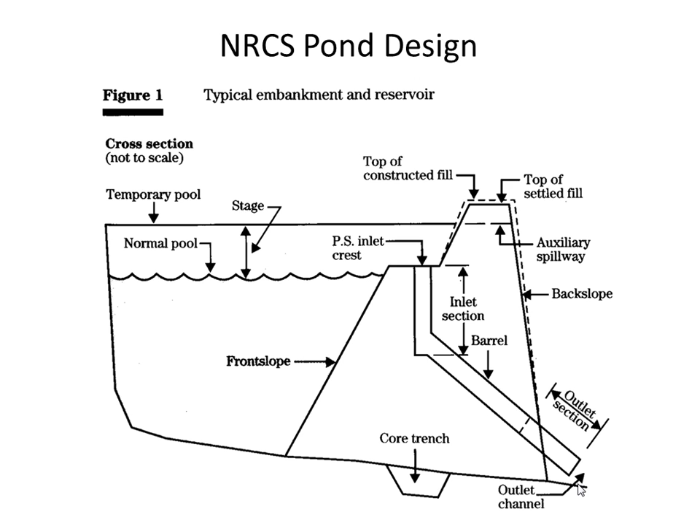Normally these ponds are built to water livestock, and I'm thankful Ed Rayburn was kind enough to encourage me to be on the program here today. These types of designs are well established and marvelous. It seems to me the one at the animal science farm is currently not functioning—it's not actually providing water to a trough down below—and I think the pond itself needs to be renovated. But this is a marvelous tool; the designs are well known, and it's a fine example.

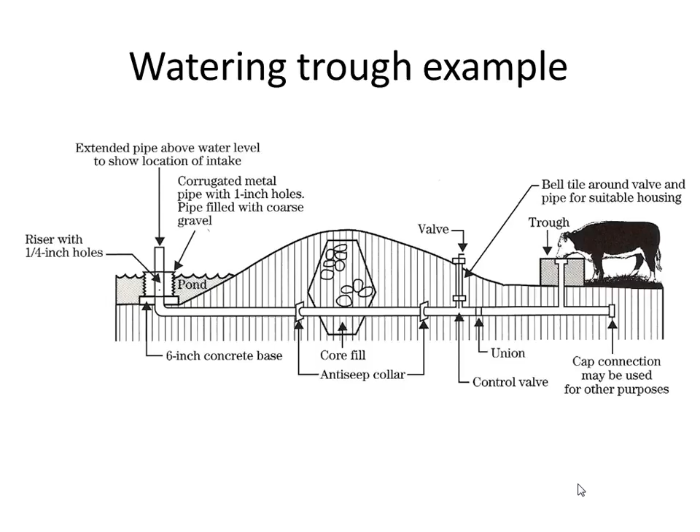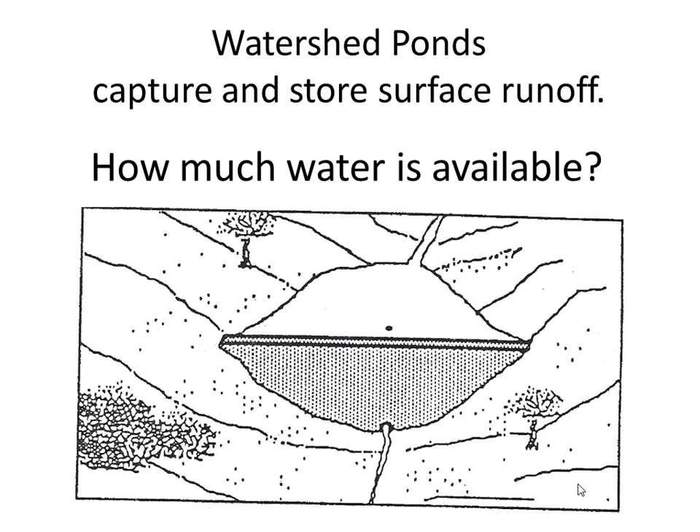Joshua and I were kind of asking ourselves, how much water do we let go? I don't have the answer to this, but the next question would be: what is the value of that water were we to use it? So we went through a mental exercise and chose a particular example. I'm going to go through several slides here that get to a bottom line.

Obviously, you can have a drought year, you can have watershed characteristics, whether it's wooded or whether it's pasture or whether it's something else, whether there's seepage, and so forth. So we went through a particular routine here.

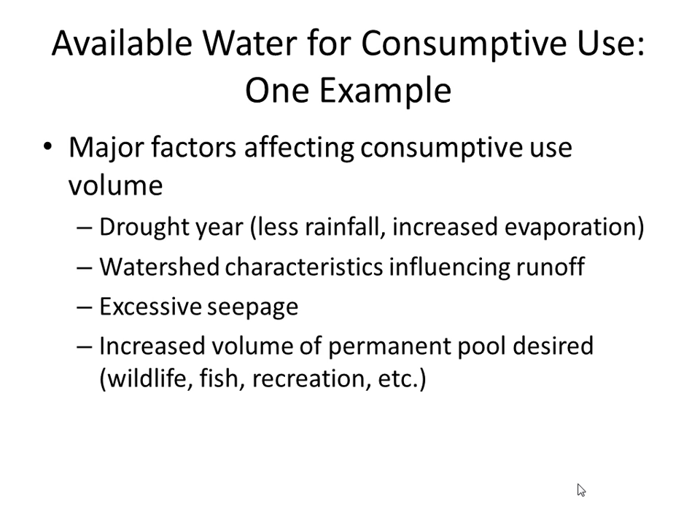All right, we assumed 50 acres as an area. So we're talking at this point in time how much water comes off a watershed of 50 acres. We assumed that it was located in central or western West Virginia, given the soil types and so forth. We assumed an average climate year. We assumed that there was a pond in that 50-acre watershed that had 2 acres of surface area. We assumed a typical seepage of 2 inches per month. And we assumed, retain a permanent pool of 20% of overall volume.

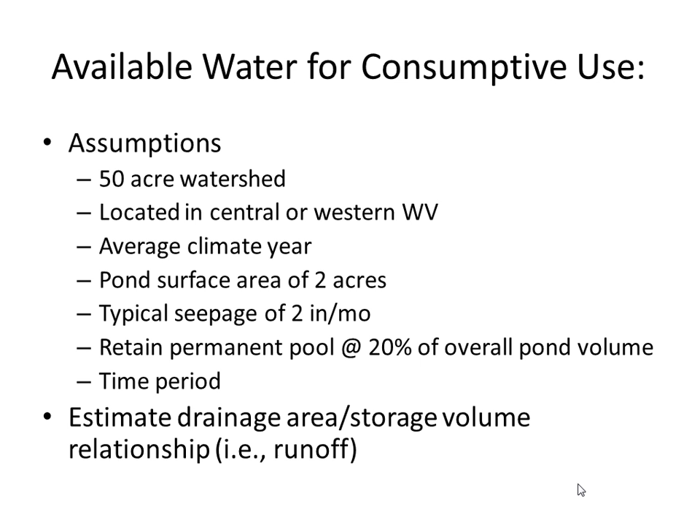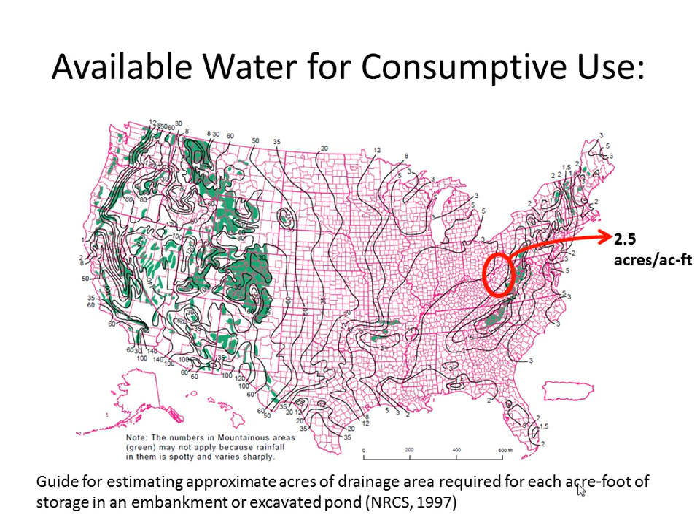So the basic idea is to take an average situation with about 50 acres, and we took some general numbers. It's not like we have a particular farm and we have data off that farm. We're saying, off of this particular chart in this area, 2.5 acres per acre foot. This is a guide for estimating approximate acres of drainage area required for each acre foot of storage in an embankment or excavated pond. This was a source of information that Joshua went to get.

We assumed woods, we assumed good coverage, and that it would be protected, and we assumed soils with a slow infiltration rate. With these assumptions, a 2-inch rain would yield about 1/4 of an inch runoff, or about 1 acre foot of water. So in a 50-acre watershed, a 2-inch rain yields 1 acre foot of water runoff.

What do you suppose a 4-inch rain would do? Twice that? 3 times? According to Joshua's calculations, because you don't have that water going down in the ground the same way, more of it's going to run off. And he estimated about 5.5 acre feet.

And 1 acre foot of water is about 325,000 gallons of water. I think in terms of acre feet when I think of ponds. I think in terms bigger than a 1/2 acre very often. Let's see.

So these were some of the other numbers that Joshua came up with for the 50-acre watershed. Runoff of 20 acre feet, rainfall of 2.7 acre feet, evaporation 3.6 acre feet, seepage 1.3, and a permanent pool volume of 4 acre feet. After losses, he estimated that there was 13.8 acre feet available for consumptive use.

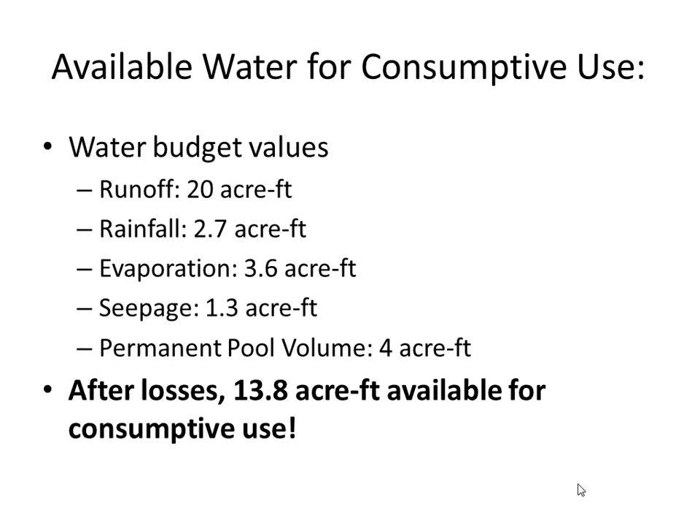If you're using it for human consumption, you're going to have to do something to it, obviously. If you're using it for livestock or whatever. So that's kind of, yeah. Say again? I didn't understand, I'm sorry.

Dry hydrant, yes, absolutely. So when I look at the traditional design of a pond, what I see is something that's especially good at watering livestock. That's originally the reason it was built.

It does add value to the property, and these days we have homeowners that want to have a pond near their property. Perhaps they'll use it for a dry hydrant, and that'll lower your insurance rates a tad. But they're not thinking about watering livestock. They're thinking about recreation. They're thinking about just a nice vista.

But recreation is obviously important to them, and fishing and so forth. Wildlife gets benefit from these things, and it does capture sediment and nutrients, and I'm sure that was an important goal for the original pond projects that NRCS was involved with more commonly in years past. And there's your dry fire hydrant. So absolutely.

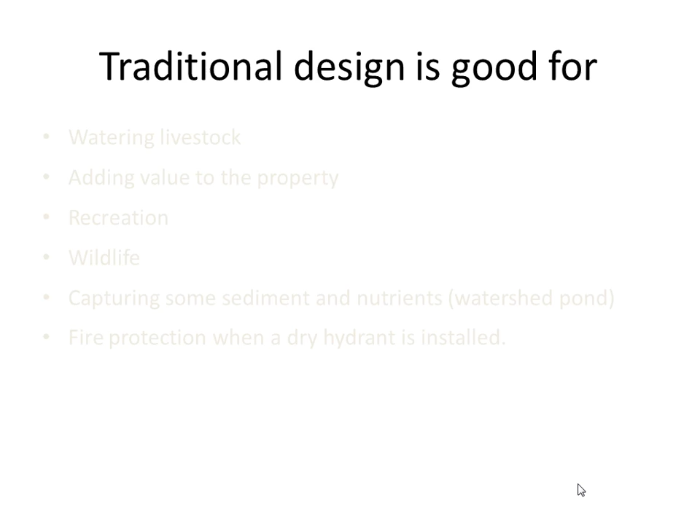It's not so good for some other things. There usually isn't enough water there to irrigate. You have a half-acre pond. You can water your livestock, but for livestock, if you're doing 10 gallons per head per day, it's a relatively small volume. If you're irrigating an orchard, I don't know how many inches of water you have to put on, but you can use that half-acre pond, that 2 acre feet, up fairly quickly for irrigation. For field and orchard spraying, you might be able to use it a good bit.

One of the things that you normally want for field and orchard spraying is a nice clean water supply that doesn't have debris and so forth in it, doesn't have aquatic plants that'll help clog things. Anyway, aquatic farming, that's where I'm coming from. We can use this water to grow things, whether it's for our personal use or perhaps to create a profit opportunity.

I'm always interested in microhydro, but I can't say I have ever seen anyone doing it successfully. I always use that as a litmus test. If there's an idea out there that's been around a while, and I can't find anyone who's doing it and making it work, whether it's for personal gain or for personal profit, I'm usually suspicious of it.

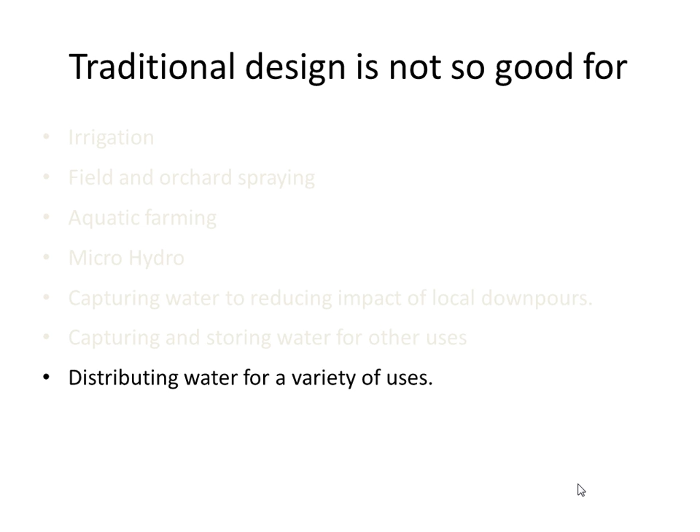So I'm going to show you a few other drain systems here. These are things I've run into through the years. I don't remember exactly where this particular figure came from.

You may have seen it before, but in this case you have a handle that goes down to a little valve, like a shear type valve, and then you have a riser here. I really like this—they put a wider pipe over the top of that so that you're doing what I call deep water release. That is, the water is being released from fairly deep in the pond, and it goes out.

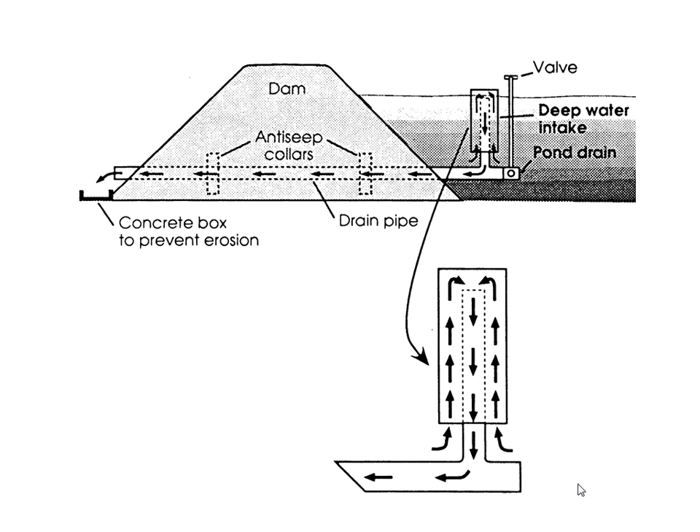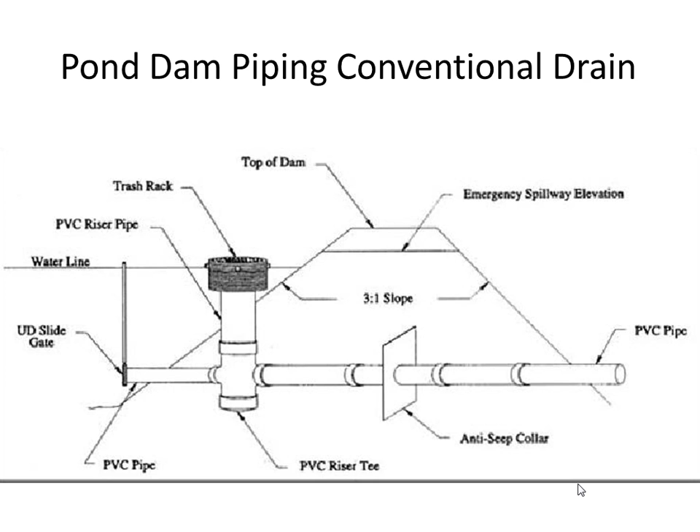Here's Pond Dam Piping, a place out of Georgia. They also sell these siphons—I think I have something on that—but this is very similar to the other one. This is all PVC material though, and they have a trash rack, and they don't have the deep water release on this.

You may have run into AgriDrain. AgriDrain has a very interesting and I think a very nice set of products. In this particular case, they have these boards that slide into a groove, and here's your water level set by those boards in that tower. And once again, you can get deep water release off the bottom of this pond.

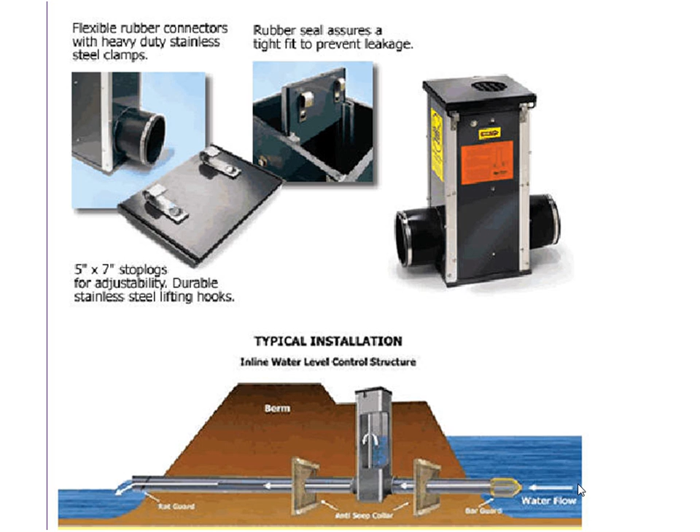Of course, all of these things that are put in the pond have anti-seep collars. And when you're making a pond like this, it adds cost. Putting this type of system in adds cost. It's something you really benefit from if you ever have to work with that pond in the future. But in installation, sometimes you short these types of costs. So if you have to ever drain a pond—and these are some of the reasons—you have to repair a pond.

Sometimes ponds will get full of silt. Over a period of time, it'll add up, or they'll get a whole lot more mud on the bottom of them, and you may have a need to renovate it. There are some types of weeds where if you have a winter drawdown, you can kill the aquatic weeds around the edge. That would be another reason to have the ability to control the water level.

When these sediments build up in these ponds, they'll have a lot of organic matter in it. And if that is exposed to the sun, that will bake. You've seen mud bake down over time. It gets thinner and thinner. It cracks, and you can oxidize these sediments. It's actually very good, it's healthy for an old pond to be able to dry down, and it's a way to make a lot of these nutrients more available than when you fill the pond back up again.

If you ever have to recover fish, it's handy to have the drain. Imagine if you could not empty a pond, you couldn't be sure that if you're going to grow a crop of fish. You basically have to finish one crop, get all the animals out, and then very often you'll poison it so that there are no animals left, even in the drain pipe or even in the footprints or the holes that are in the bottom there.

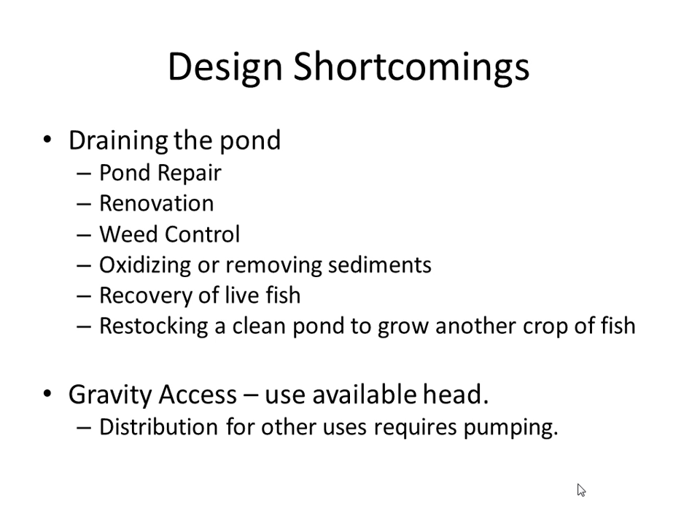Okay, so I'm going to throw out the concept of a multi-use pond, and I will not claim that I have one. I wish I did. I'd like to put one on the Reedsville farm. I have a location picked out. But this particular concept is where you're intending to capture the surface water and manage it for a variety of benefits that really can be set by you. You can decide what enterprises you want.

If you applied this, you would end up with larger impoundments, watershed ponds, and some way of a different design on the drain system.

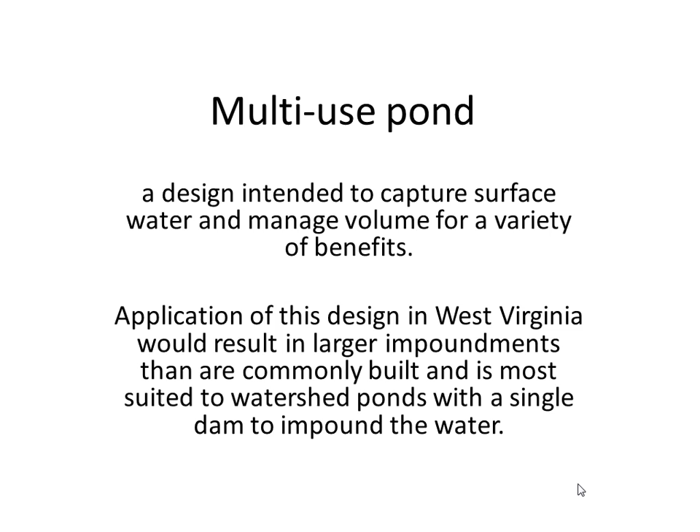So you set aside in your mind, I'm going to take the top 4 foot, or the top 3 foot, or the top 6 foot, whatever it is. And then you have a drain structure of some sort that will allow you to do that.

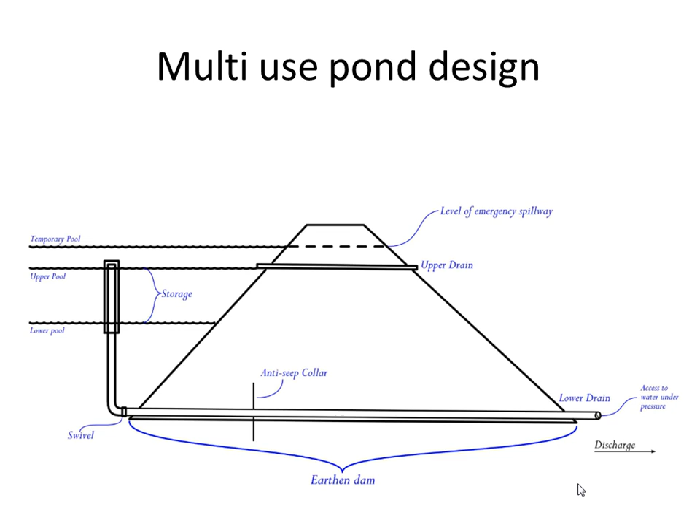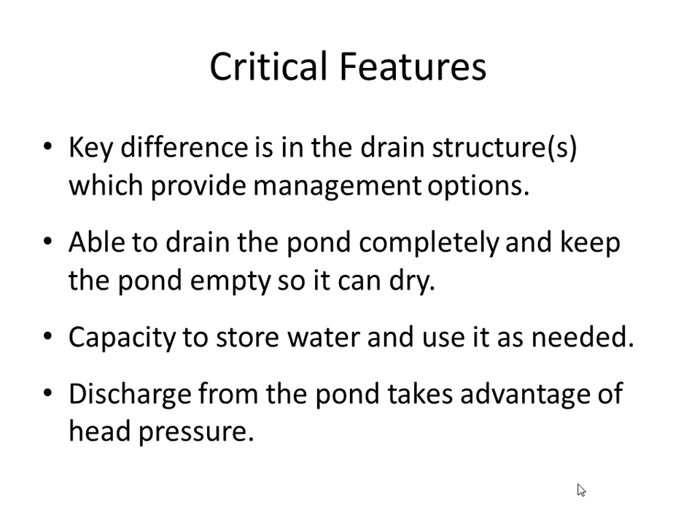I'll show you some more why in a minute. So the basic difference is in the drain structure. You can drain the pond completely and keep it empty so it can dry, or you can have capacity to store water and use it as needed, discharging from the pond taking advantage of head pressure or gravity.

To me, those are the components of a multiple use pond. So here's a couple of ideas. You could vary the size of the storage area. You can set aside in your mind whether you're going to take the top 2 feet or the top 10 feet of water.

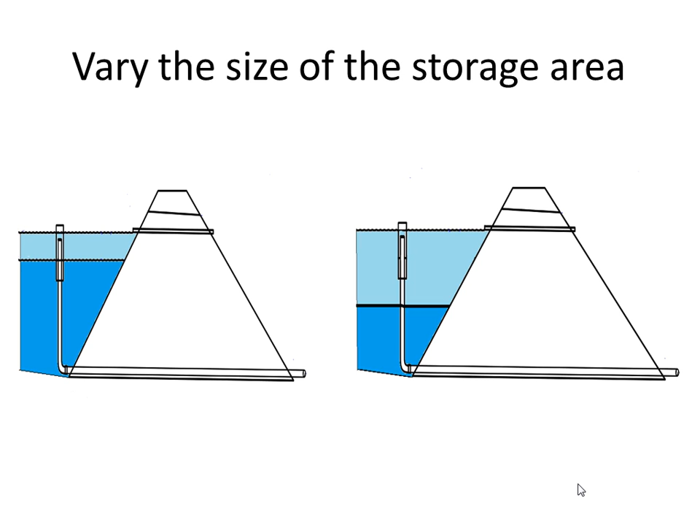And you can have a variety. I have what I call consumptive uses and then non-consumptive uses. Think of this: if you have first a non-consumptive use followed by a consumptive use, you end up using the water twice.

So traditionally we're talking about watering livestock. Let's keep doing that. Maybe you want to have an acre of sweet corn. Maybe you want to grow peppers. Maybe you want to grow some kind of higher value vegetable crop that you might sell locally. Maybe you'll have a high tunnel. Maybe you'll have both.

These days, some people are building ponds to harvest water so that they can use it to frack. I'm calling that the fill and tote. It's not as though this is a reservoir that's used at the well site. This is simply a place where you're capturing the water, and that water is then taken somewhere else where it is used. So this is simply harvesting water, and in fact there are a number of ponds that have been built by energy companies for this purpose.

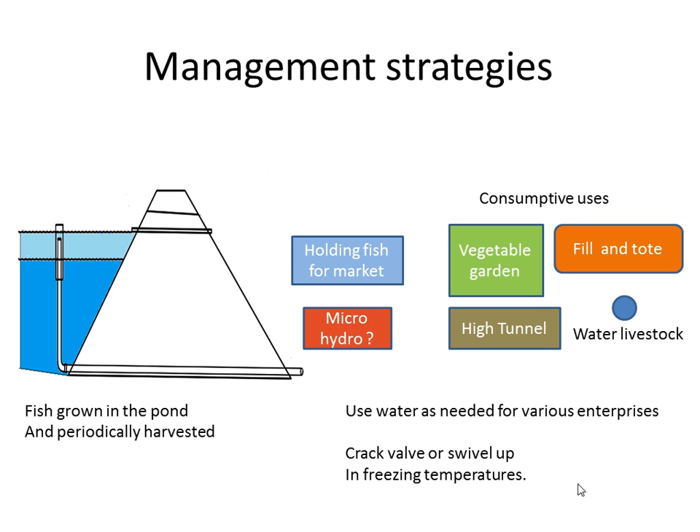I like this one too, whether you're holding fish or growing fish for market. But I don't know if there's a possibility for microhydro, and that's why there's a question mark there. So, these are some of the ideas.

How much water does it take to grow an acre of sweet corn? I think you're talking about maybe three applications of 1 inch. How much is 1 acre foot of water? If you have 1 acre foot of water over a 30-day period, it will deliver 7.5 gallons a minute.

If you have 1 foot of storage, 1 inch per application, that's 12 applications over a 1 acre area. Or, 1 acre pond versus a half acre pond with 1 foot of storage, 3 inches per application, 2 applications over a 1 acre area. These are just different scenarios you could go through.

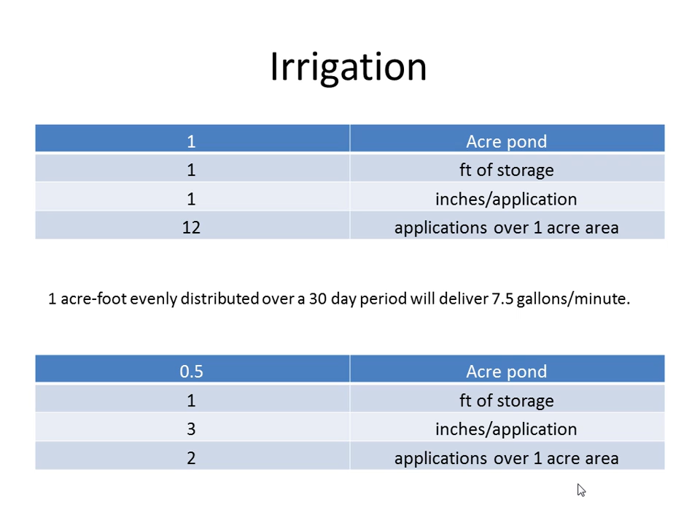I also look at maybe having some levee ponds below that, with a crop of catfish fingerlings in there, maybe some bluegill or hybrid bluegill or something like that.

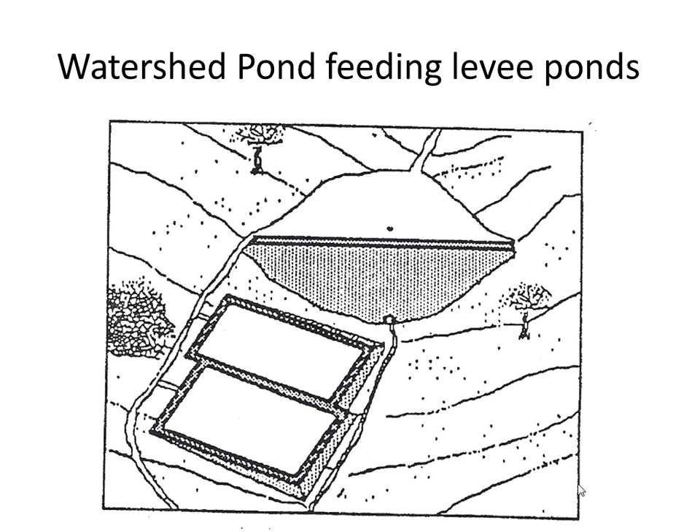There is new technology that comes around—Joshua gave this to me—a supplier of grassland and forage irrigation systems out of New Zealand. This is a little different type of system, and perhaps at some point new technology will make it so we can make better use of our water.

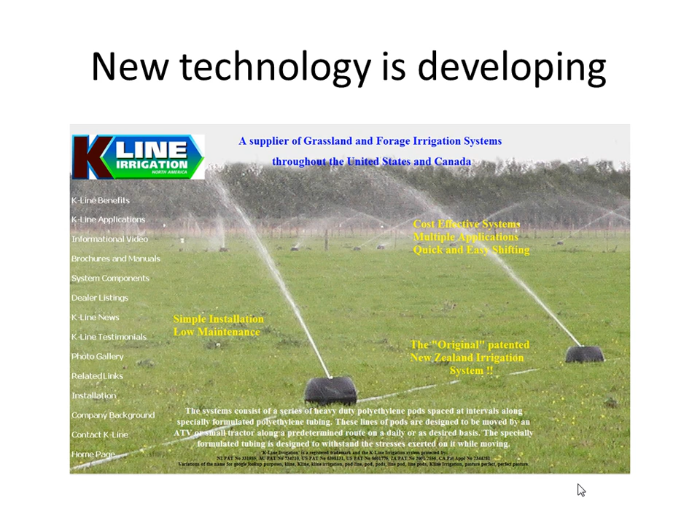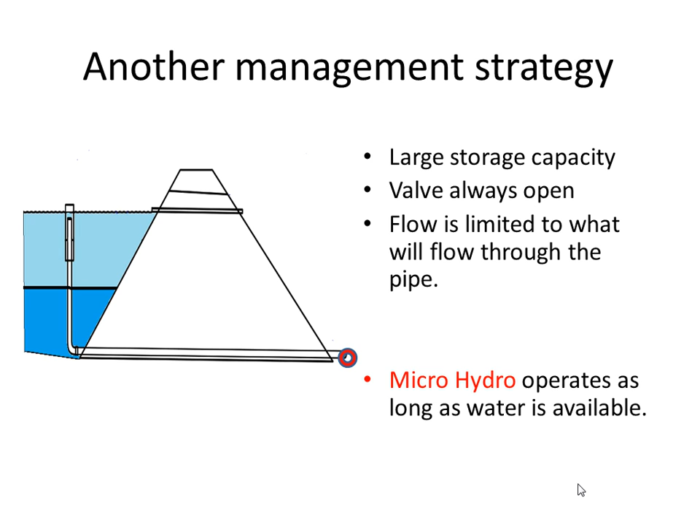Another management strategy: large storage capacity, leaving the valve open. All right, I'm going to go through here. This is where I like the flooding type thing. Imagine if we had these things spread over a watershed, and let's say they were dams large enough that you're going to use the top, say, 6 foot of water, or the top 4 foot of water. If you had them in series, what would be the result?

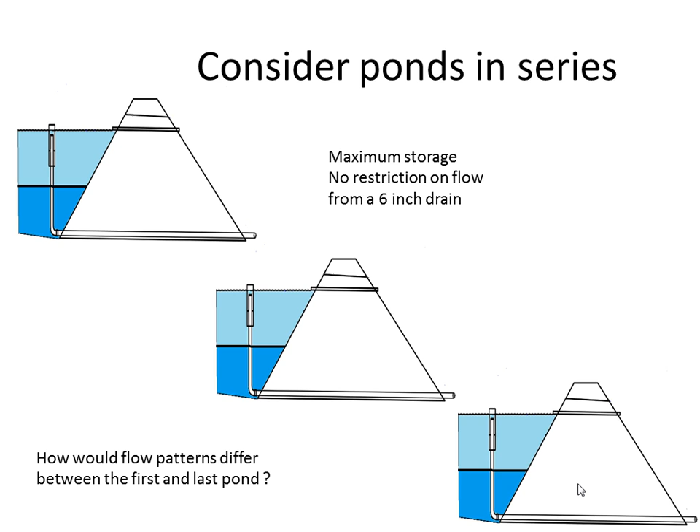Let's say this one is at the head of the watershed, this one is another half mile below it, and this one is maybe another 500 feet below that. Or maybe there's even more on the watershed. What would tend to happen is that, if the water ended up being distributed by essentially what comes out of the drain rather than what goes around the spillway, it would be like a big sponge. Certainly it won't be as dramatic as that, but it could have an effect of spreading out this flow over a much longer period of time, or at least a portion of the flow.

But it doesn't have the effect if all of the ponds are full and it all just happens—it goes around the spillway and spreads out, at least changing your temporary pool. But if you designed these things to capture water, and considered a water budget for distributing that water over time, we could have a greater impact than we do with our current ponds. I like swivels.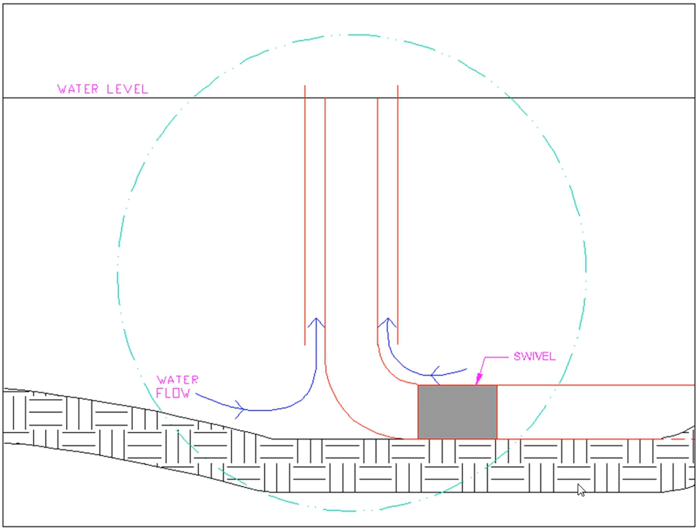I always like to put a deep water release situation on. Tom Baisden—Tom, are you here? Tom put one of these in his pond. He's got a pond just below his house, and he's got one in.

You can also put the swivel on the outside, and this is what we did in Arkansas. We ended up having a winch.

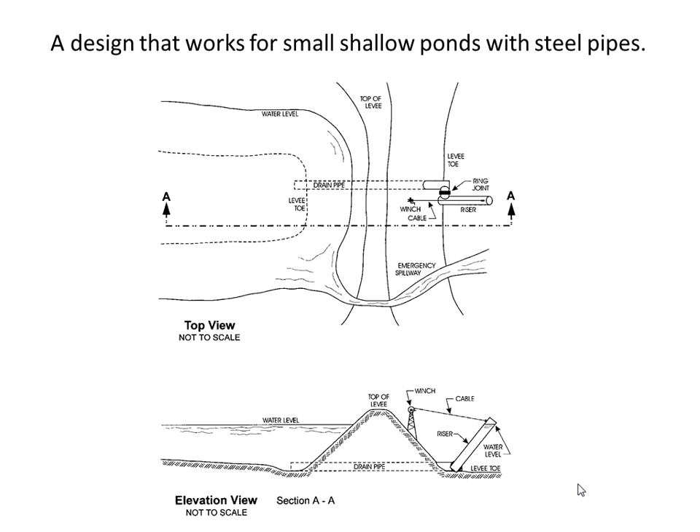One of the problems was we had to tie the handles on these winches because they had cattle. Those cattle would go up and rub against that, trip the winch, and the pipe would go down—when you come back in the morning, the water's dropped about 3-4 feet. Fortunately, the fish don't tend to go through at that point.

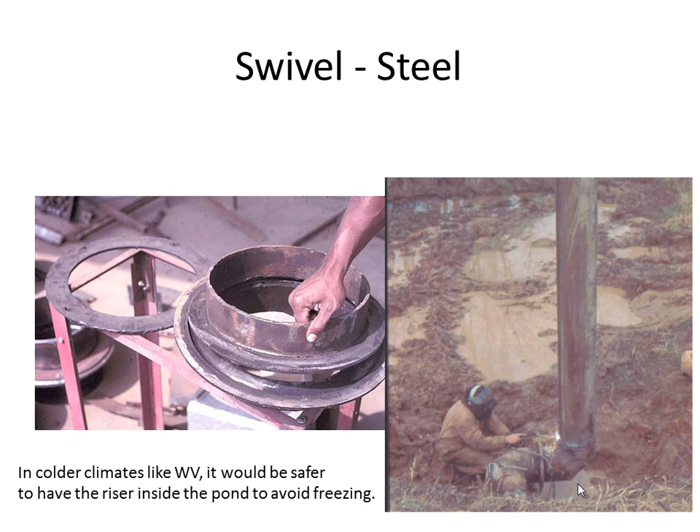And this is a design—I actually have a drawing on this if anyone wants it. If you make them out of steel, this is what we were doing in Arkansas. I was there, and we made these swivels in Georgia. We actually bought one, copied it, and on the farm I manage, we had to build it before we managed it. Here's an example at Reymann Memorial Pond.

I have one of these. It's a very shallow pond, and actually putting the swivel on the inside in a shallow pond is a lot easier than in a deeper pond.

But at Reymann Memorial Farm, the beef testing—beef cattle testing—I'm sure you all have been there for that purpose or heard of it anyway. There is a fish house. If you happen to go there, please do stop by. I have a fellow named Matt Farrell.

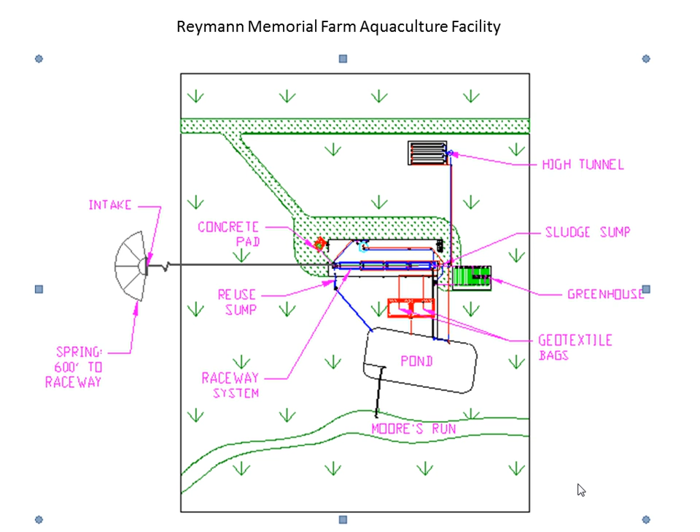What we have is we capture the water, it goes into the fish house, and then it goes into the pond. We've also got a greenhouse and a high tunnel where we're doing some aquaponics stuff. But in the pond here is where we have the setup that I'm going to show you.

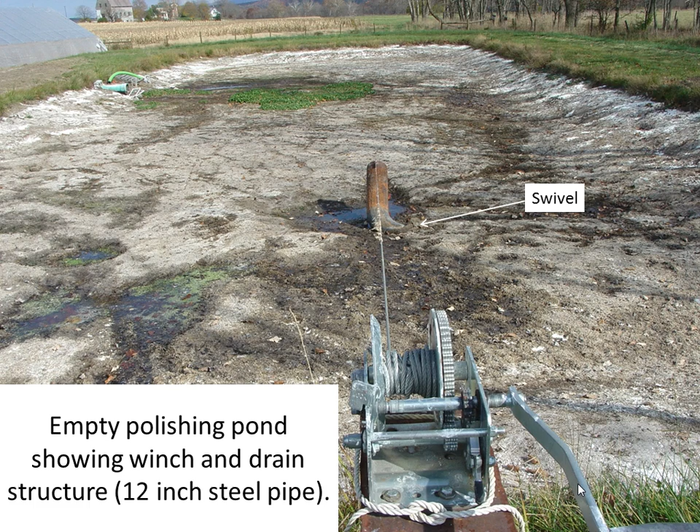You have a winch in front of you here, and the swivel is pointed out there, with the pipe actually about halfway down. If the swivel is a little stiff, I'll put a counterweight on it to help pull it down.

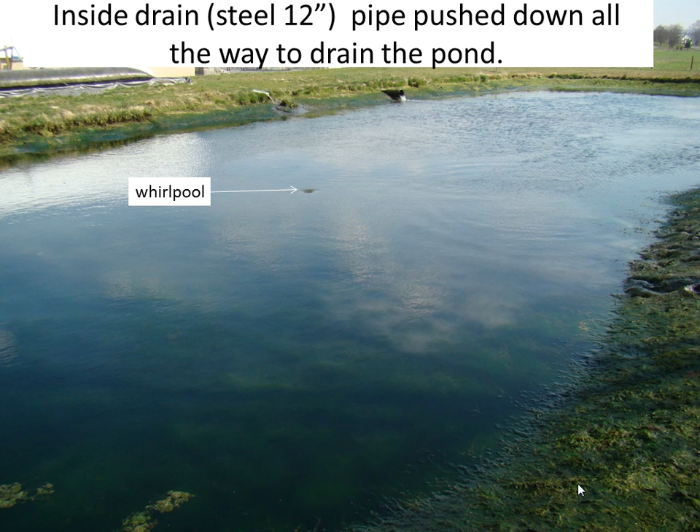There's a whirlpool showing the pond draining. See, there's 400 gallons a minute coming out of the spring—I can't really stop that, so we're getting all the fish out. And the darn pond's full of algae. Have you ever tried to harvest fish in a pond full of algae? See these white hairs? Okay.

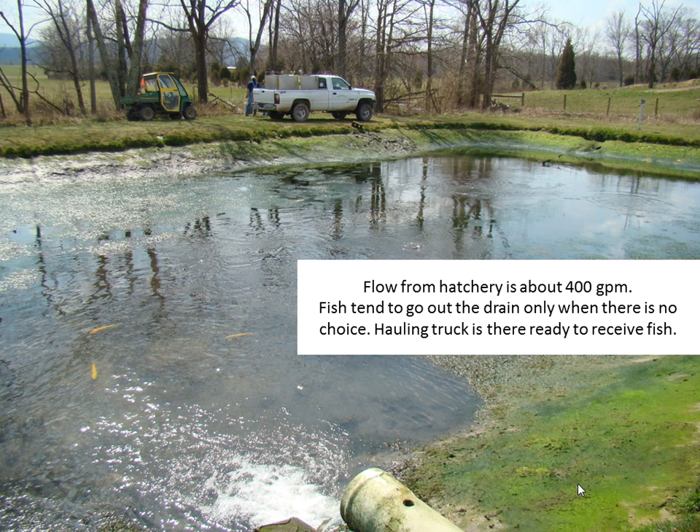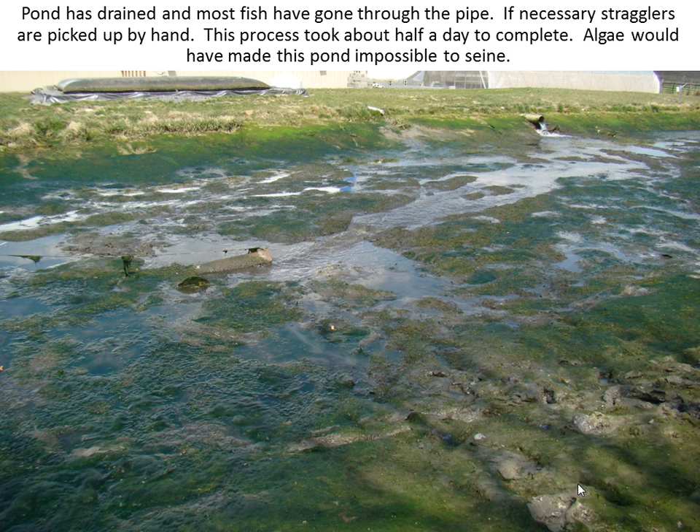This same principle can apply if you have a small pond on your place and want to harvest fish out of it. That's why a drain is so handy to me, but there are other reasons too. I usually try to let the pond dry a little bit. In this case I couldn't, but you can see grass started growing. I filled the thing up before the grass jumped out, and I was able to drown that grass, and my pond is still okay.

The benefits of a multiple-use pond are to enhance capacity for production of food, whether it's fish or vegetables or whatever, the ability to manage risk, and contribute to food security. Ecosystem services is a word I really don't understand that well, but it's supposed to include things like water quality, capturing nutrients, groundwater recharge, increasing biodiversity, and fire protection. I'd like to think that if there are enough of these, built well and managed for this purpose, you could impact the severity of flooding. And that's all I've got.